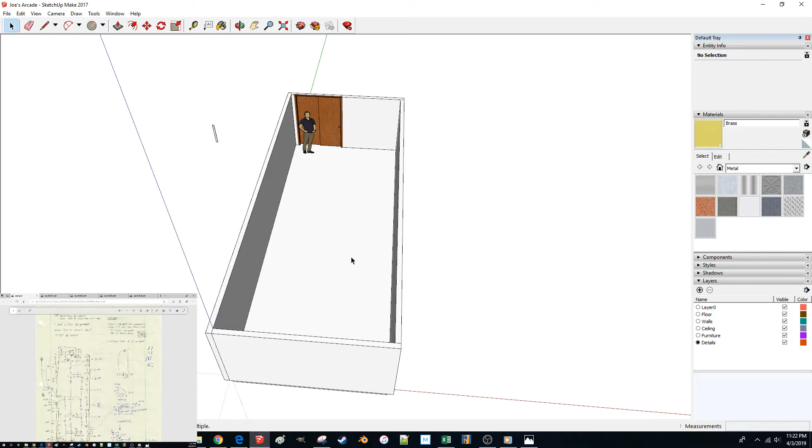And yeah, today we're going to try to do some of the trim around the floors and maybe do some of the rough tile texturing on the floor. And if I get really ambitious, I might do something with the lights. Big difference, hopefully, this time is that I've kind of looked ahead at what I'm going to try to do, so I will hopefully spend less time scrambling for dimensions on my really super messy notes that you can see here.

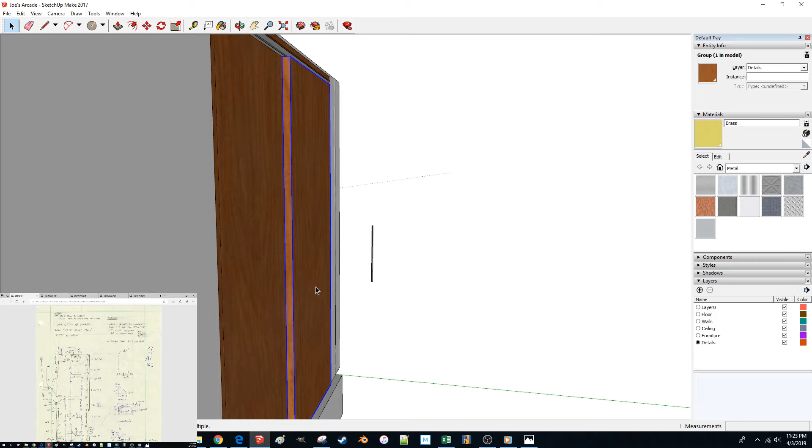Yeah, so anyway, right to the point, one comment that I received from the actual Joe of Joe's Arcade, who is not this guy, is that when I made a guess in the first round at what direction this door faced, my guess was wrong. So that should be flipped, I believe, and I did kind of verify that with the video here. He said that the one door is backwards, and I know this one's the right way because of where the handle is in the shot.

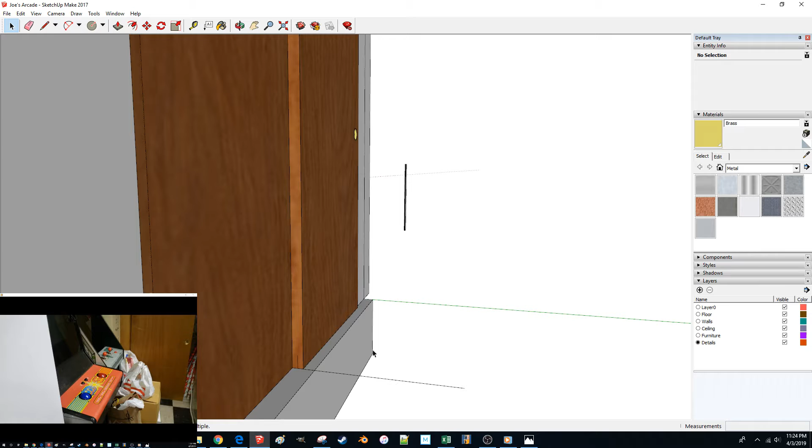So I'm going to flip this from my best understanding of the way it should be, and if I get it wrong, hopefully he will let me know and I can try to get it right again. Anyway, let's just scale that guy at a -1 like before. Move it in back to where it was, and now that handle is on the other side, and I think our doors are facing the way they should. And I guess that makes sense because it's probably the same door, just rotated 180 degrees to fit.

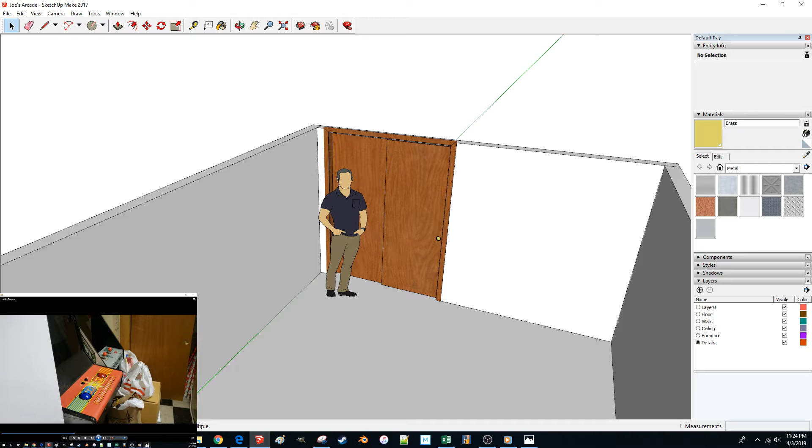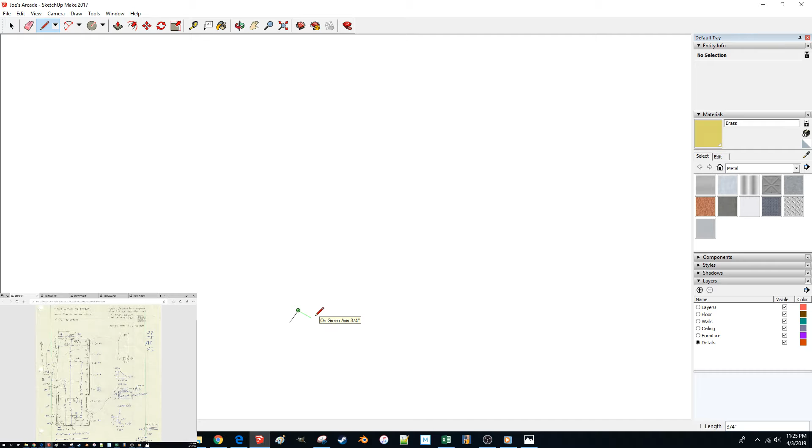Just off to the side here, I think, is where I'll do it. I'll kind of make this my component yard. So for the ceiling piece, that's going to be 3/4 of an inch. I'm going to have to get in real close here. By 3/4 of an inch. And then I come up at 0.2 inches, 0.2 inches, and close. And I'll just give this some length and group that. So that's going to be my ceiling piece.

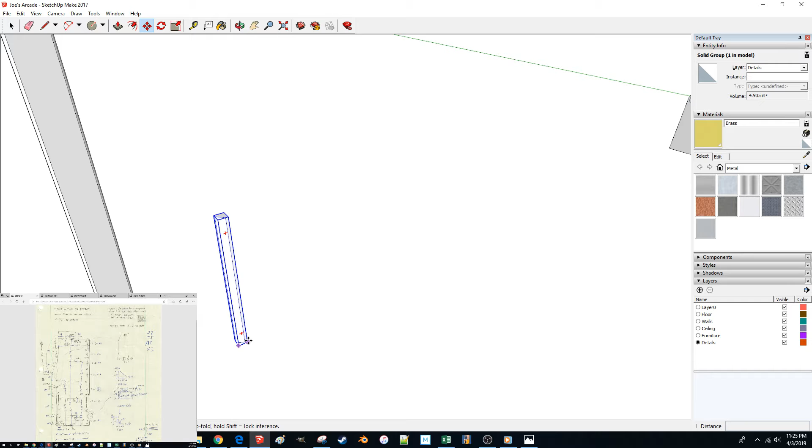And actually, let's go ahead and run that in. So I'll move it over here, and I'll rotate it down. Kind of a good example of what I'm going to be looking for, I think it was around 2 minutes in the video here. Maybe not. Oh, there we go. So clearly, I did not plan this out as well as I had expected. There we go, though. This is kind of what we're going for, is this detail in the corner here. This top row is what I'm doing, and then I'll do one for the corner and the sides.

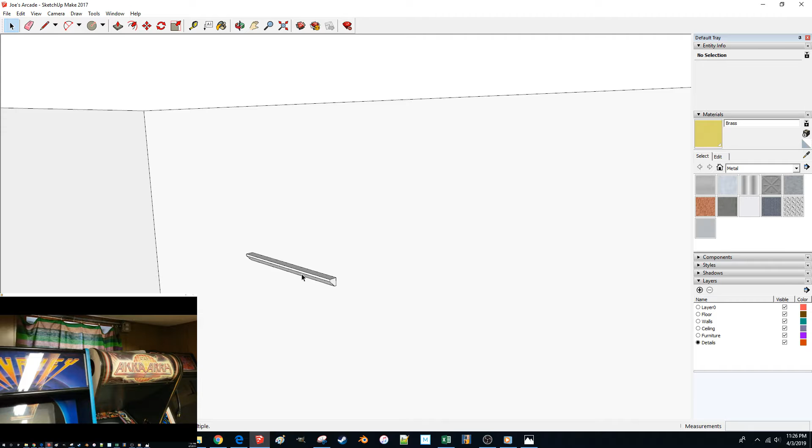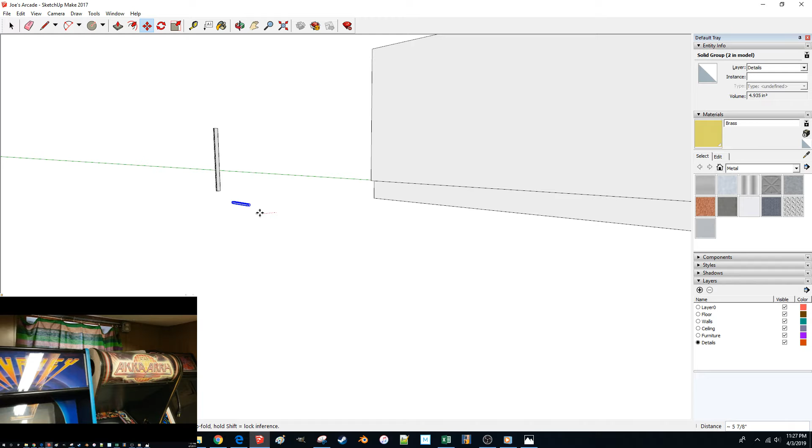Okay, so if I move this then up to our corner like that, that's how it should look. I'm going to copy it, because I should have done that before so I don't lose it when I make some geometry edits to it. Let's just put this down with our other piece for safekeeping. And I'll make another copy for this wall, one for the other wall, and for wall number 4. And I'll just end up rotating those around here. Drag this thing out like so.

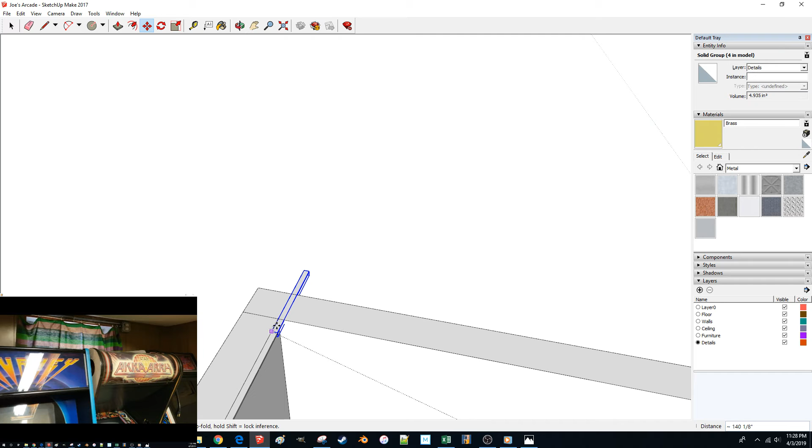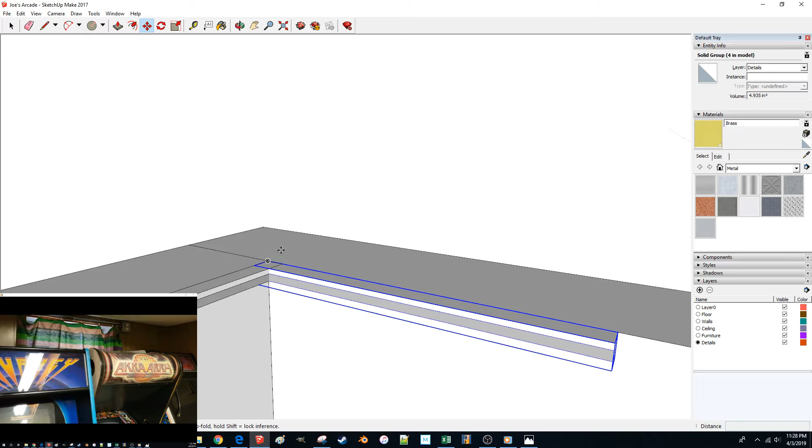This one will come up here to that corner, but it is going to actually need to rotate about this edge. Nope, I got it backwards, but that's no big deal. Rotate it there and like that. And I've already got a copy over on this side. So let's move that around. I'm keeping these on the details layer just because basically I'm going to use this layer for anything that is not a critical piece to seeing how the room looks. Just kind of some extra flair. So we've got that piece. Let's make that longer.

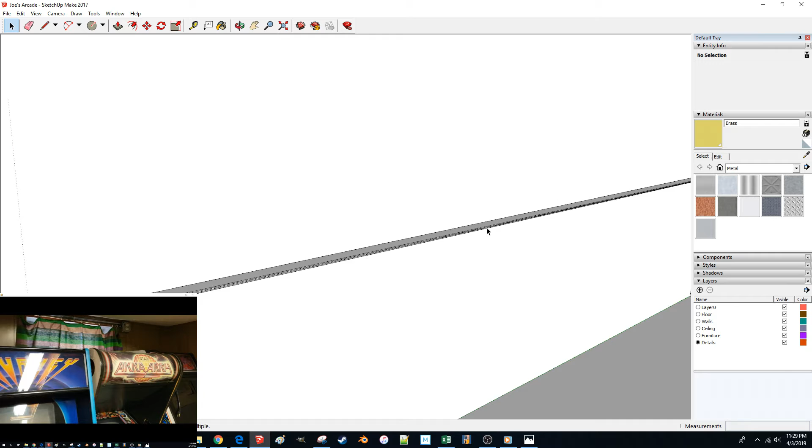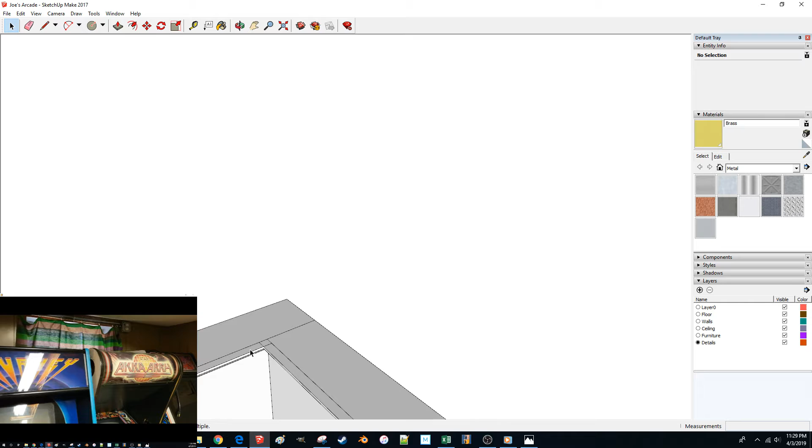Make this one a little bit longer. And then come on over to this side. I'll spin that. Move it on up. And then it's just going to extend here to the door frame. Obviously it wouldn't go past that. And we'll go ahead and copy that then to the other side to fill in that little gap over there.

And pull that back to where it should be. Okay, there we go. But I do think I want to clean this up a little bit because I'm a little bit of a perfectionist with this. And generally, I think a clean model is a better model, a little bit more stable, hopefully, as it gets large.

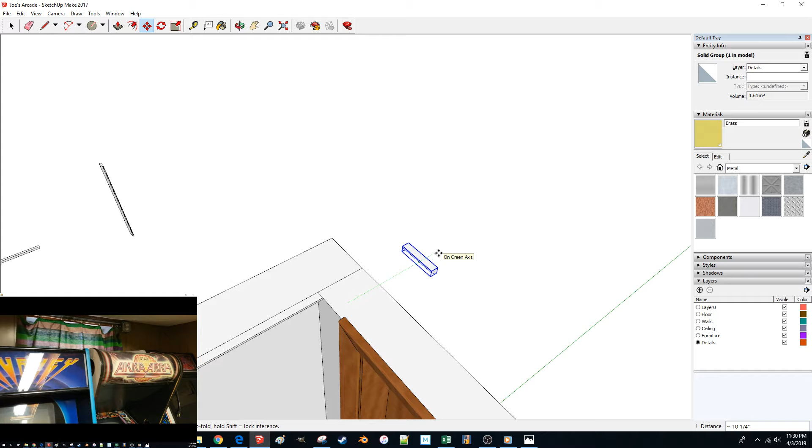So we'll do that. Let's see if what I just did there actually worked, because I don't know. Looks like I need a line up top here like that. But then I can delete these lines and still have my inner angled face there.

So move that back in. And now you can see, of course, that I've got kind of an overlapping edge here still. I think that ought to take care of it. Let's move that guy over to where I can see it.

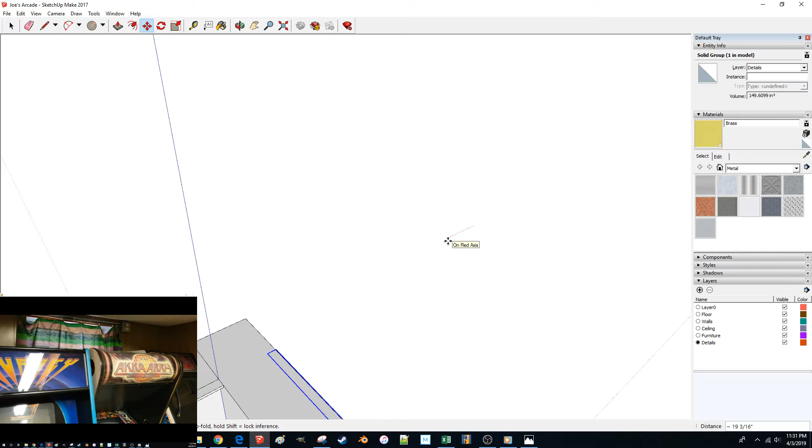Delete, delete, delete. Oops. And delete. And while I'm at it, get this side. Ooh, camera's being a little tricky there.

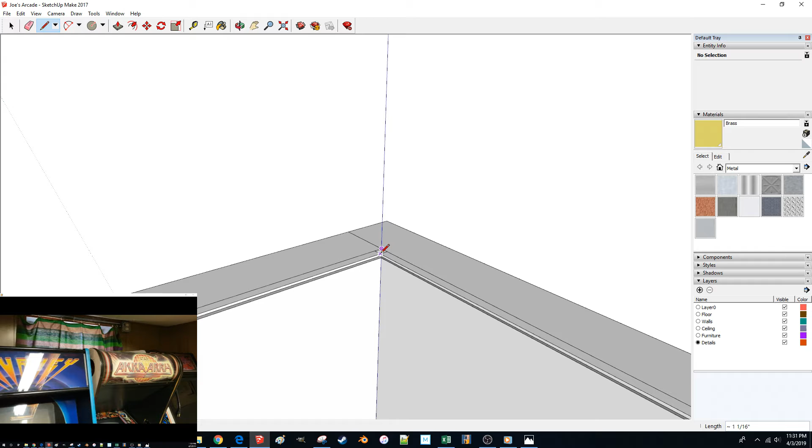I know what I'm going to do to make this a little bit faster, I think. I'm going to actually just draw this face over here. Come on up. I'll draw that face and I will copy it out this way 2 feet, and I will move it out this way 2 feet, and then I'll move these each individually as well.

I'll select those and I'll explode them, because then that line will break those faces. And I don't have to trace each one individually and tediously. But I still have to get those little bits of extra faces.

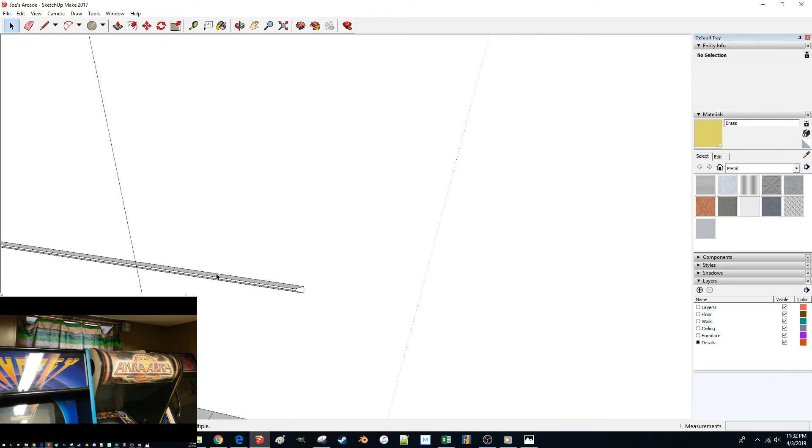That one's going to need one more chamfer cut in it. But I will need to bring it back over, it looks like, to get that drawn in.

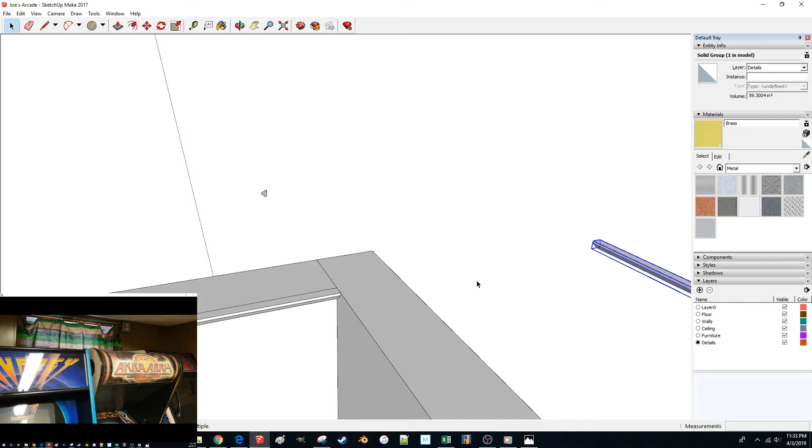So there, down, over and up. Same deal. Copy over. Move over. Move over. I'll get this one here while I'm looking at it.

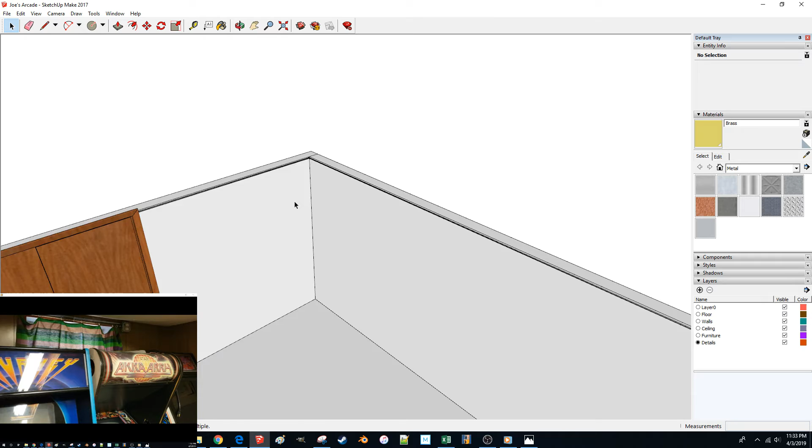Move that thing over 24 inches again. And learning from last time, I will catch this one like that.

24, 24, 24, and 24. Explode those things.

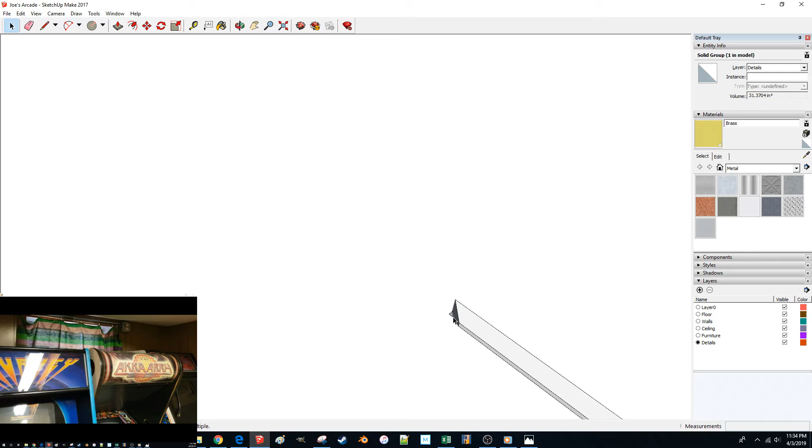This one can come back over already because it's only got the one side to do. Oh, I've lost it. There we go. And move that one back over. And there we go. Got those.

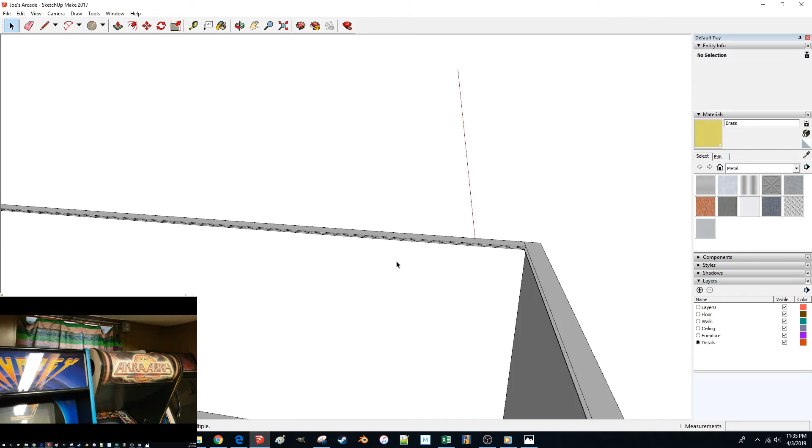Now I'll kind of do our other shape here, which was 0.75 again. Some of these little details can be really tricky. 0.18 and 0.18. And then we've got a circle in here.

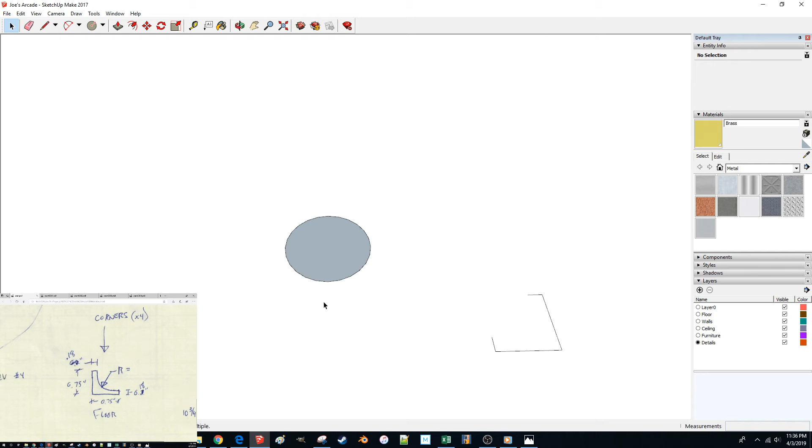And I just put radius equals, because at the time I was too lazy to actually calculate the radius, but that is just going to be 0.75 minus 0.18, which is 0.57. So it's going to look like that. And we will quarter that thing.

And it goes here. I'm going to delete that and recreate it so that I can create a face there to extrude. And let's make that a foot tall again.

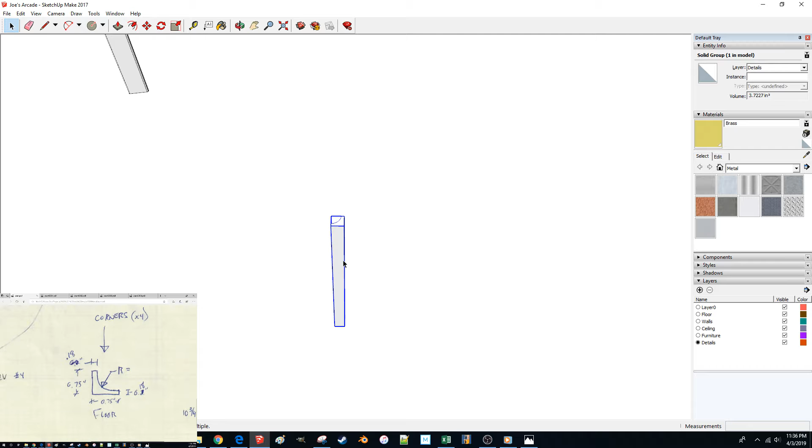This time I'll copy it over like that. Okay. I'm going to rotate it 90 degrees there. I'll copy another one, and I'll rotate this one to be horizontal.

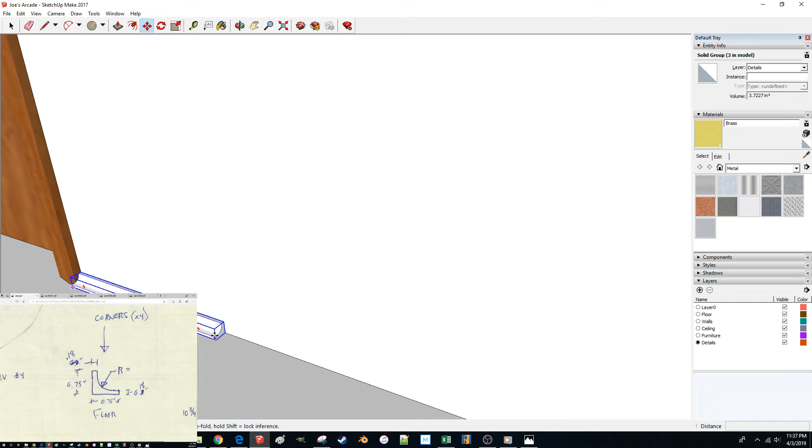This will be for our floor. Let's go ahead and put that where it goes, actually. Pop in under here. And I'll create a couple more while I'm at it for these other sections that are going to need some.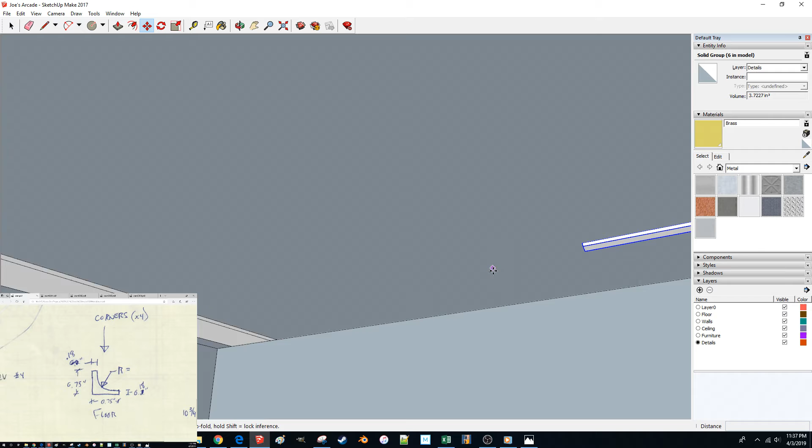Extend that guy over here. Pop in under the floor for this one.

There we go. Except I gotta move it flush here. And lengthen it out. This one's 180 degrees.

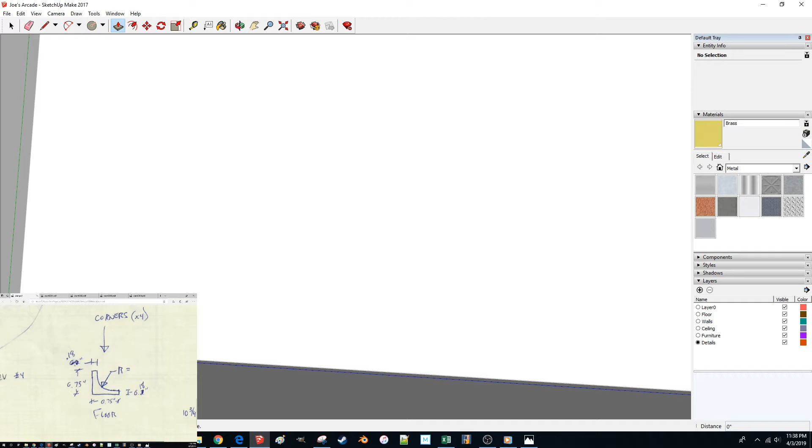And I'll grab this endpoint here. I'm using a 3D mouse for this, which is, in my opinion, the easiest way to move some of these things around, just because it enables me to move the camera right into the floor like that. With a normal mouse, it's a little bit trickier to do, but certainly doable. There's a couple tricks you can use just moving things along the coordinate axes to get that to work.

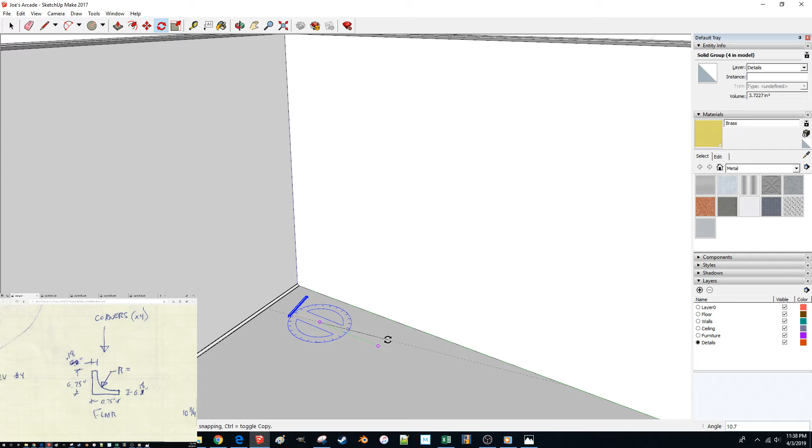With a normal mouse. We'll rotate this -90 because I can't really see what direction that's facing. I guessed wrong again, but that's okay. Grab that. Let's put it on the corner there.

And there. And last but not least, this little piece, which is going to be all of about 2 or 3 inches. Okay, I wonder if I guessed right on that. Yeah, 4 inches, not bad.

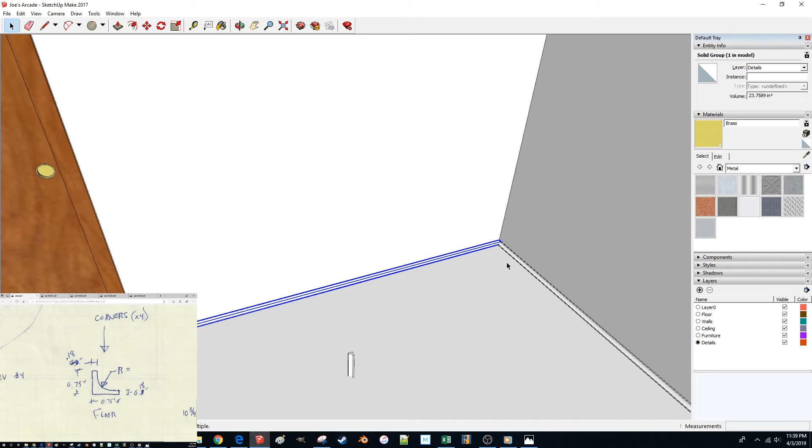Okay, so I'm going to do something a little bit different. Actually, I've got to think about how I'm going to approach this, because I do want to trim these off, but since they're curved faces, I don't want to have to draw all that geometry. So I'm going to create a whole bunch of copies to get this done.

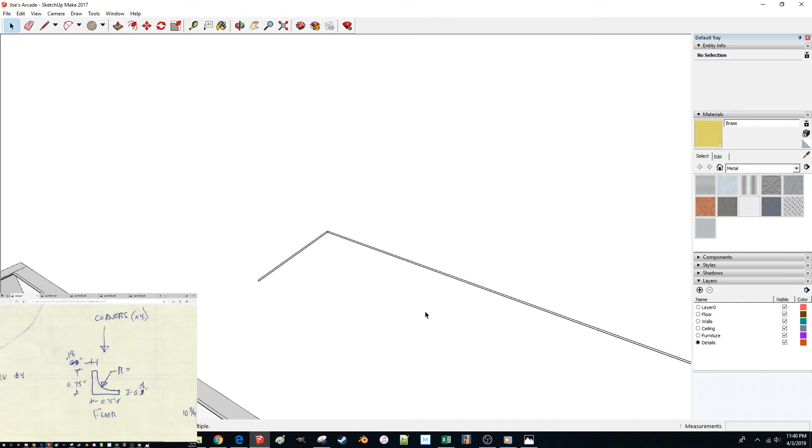I'll go over 200. I will explode these, and I'll do an intersect faces with model. And then, because I'd still like to keep them separate components, like separate pieces of wood, I will just then go ahead and trim them like this.

We'll see if this works. It sure did, okay. But before I close that loop, I want to clean this up a little bit. So we'll do that and that. And wow, that's nuts what's going on in there.

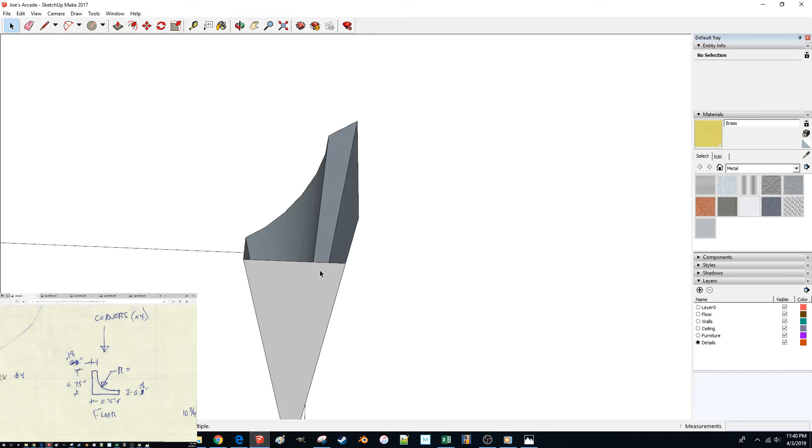Let's delete that arc because we don't need it. And we don't need that, or that, or that. And there we go, nice 45-degree chamfered edge. And I can move that guy back 200.

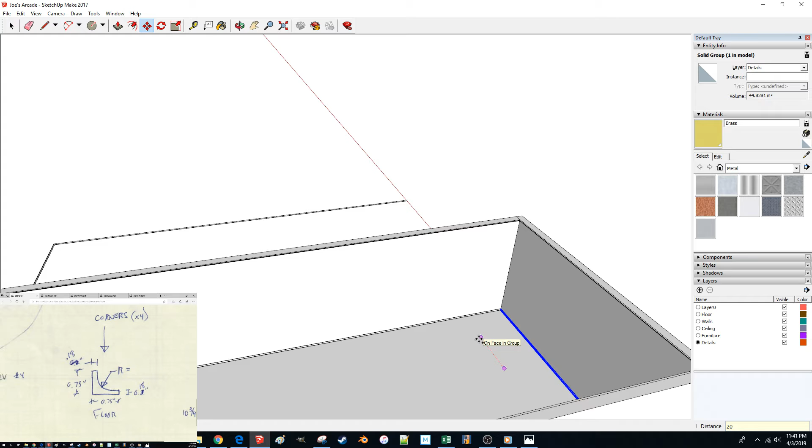I'm going to create another one for this edge here. Or this piece here, and I'll just create all of these while I'm thinking about it. Let's do that one. This will have to go, I think, 200 in the other direction to get clear of those walls. And for this last piece, let's just go 400.

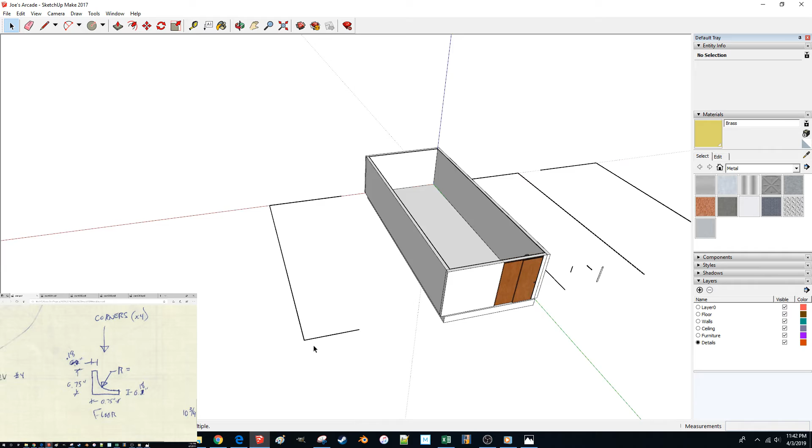And to be a little bit more efficient about it, I'll select all of these in one go. Do our explode, and deselect some of them. But then I will do my intersect faces with model. There we go, delete that.

Create my line here that I know I need now. That's gone. That arc's gone. And can't forget about these lines.

One end down. Oh, yeah, you can see the camera really gets a little bit wonky when you're doing this kind of a small detail in a large model.

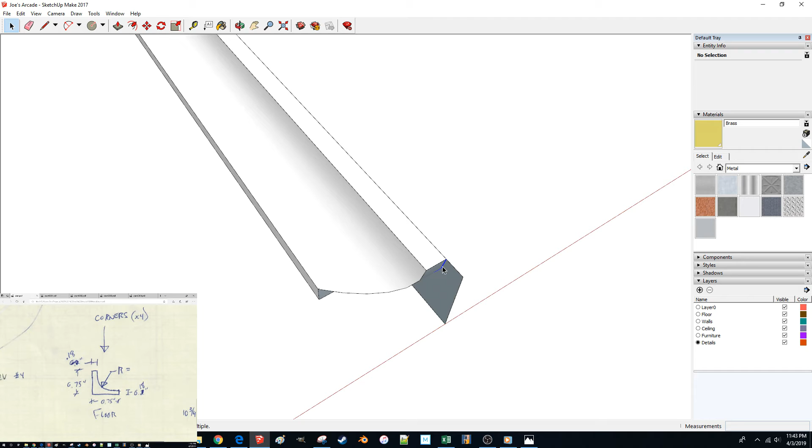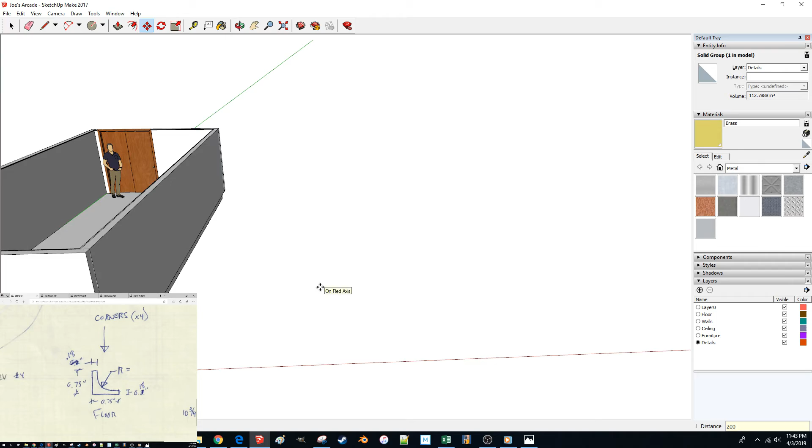There's that line. And I was supposed to delete this one. There we go. I'll group that guy back up. 200 over.

Okay, and then that can go away. That can go away, and I can delete these little bits while I'm here too. Delete our extra lines. Does seem like the order you delete some of these lines in does matter, but you get to the same spot usually.

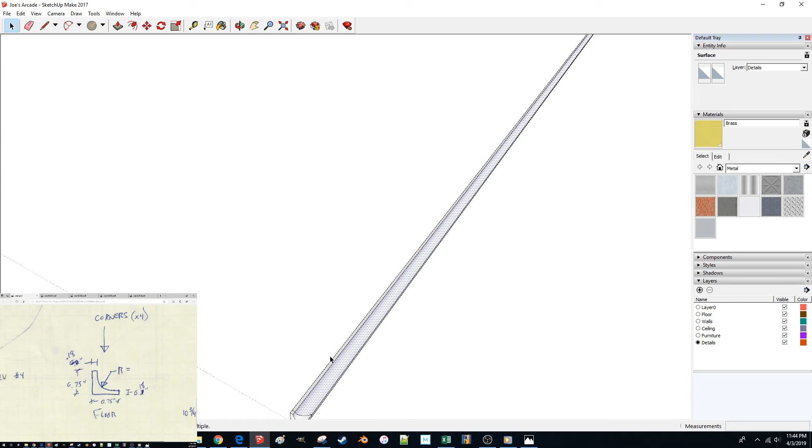I've got my nice edge there, and let's clean up this other side. And I did forget the short piece, didn't I? So I'll have to make another copy and get that one. Boom, boom, boom.

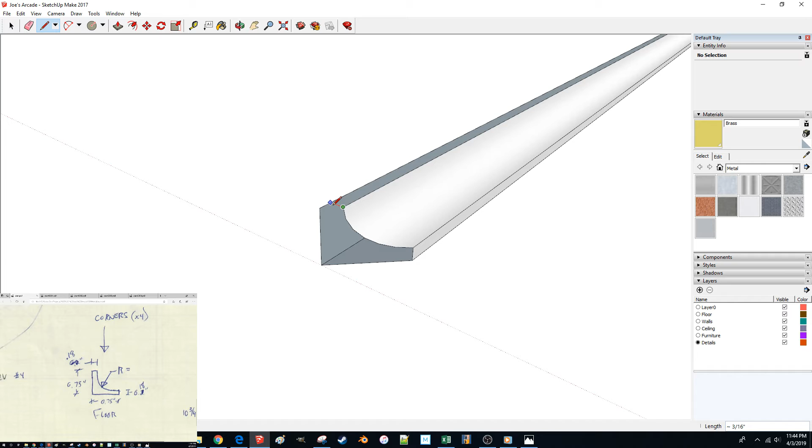Sometimes this can get a little bit repetitive, and there's other things I could do to speed this process along potentially. Depending on how many I was doing, I could create an angled face and rotate it around and then drag it around, and stretch it around using the move tool to kind of get this same effect.

Look what I've done here. I've deleted, so actually I'm going to use something similar to that method, just because I don't want to take the time to remodel that. I will copy this one and I'll scale it at a -1 factor to mirror that, because that should fit in nicely right here.

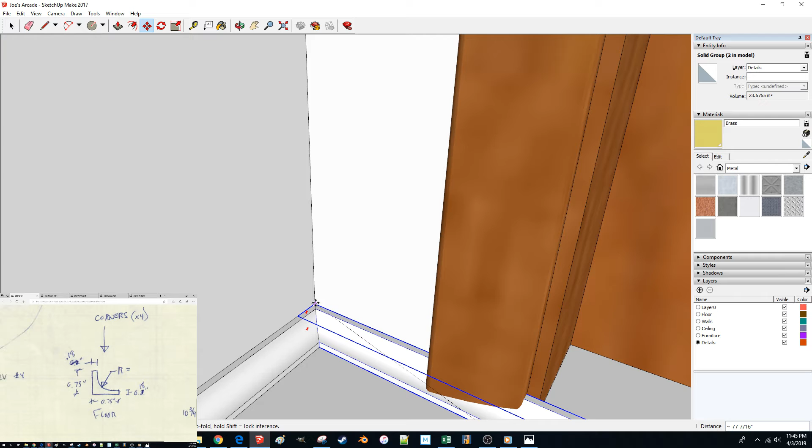So yeah, I mean, lots of different ways to get this done. I'm just doing it the way I am because it seemed the simplest at the time, but as you can see, that worked pretty well too. You have to do just a little bit more scaling and that kind of thing.

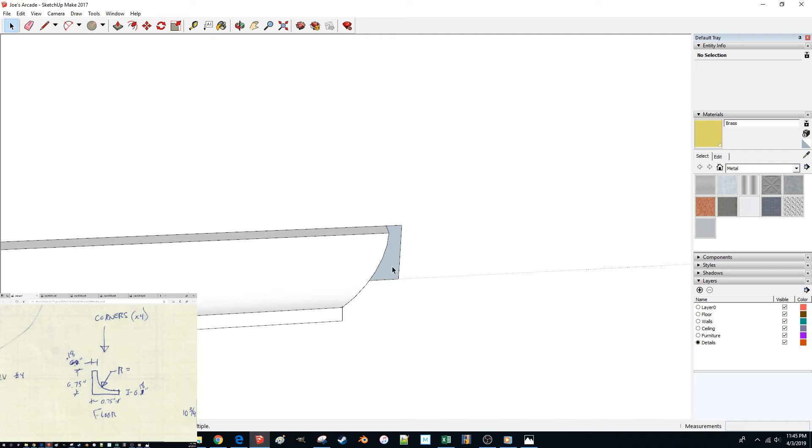Okay, then I'll come over here, get that, and these. Oh, I missed that line. Usually it's pretty easy to tell that you've missed something because the face you're watching for it to appear just doesn't show up. Gotcha. Gotcha, okay.

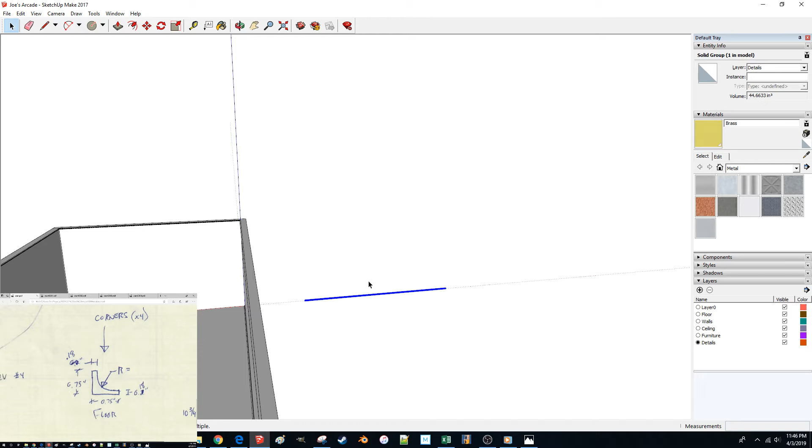200. There we go. Do I see something weird going on here? I sure hope I don't, but if I do... I totally do. What is that all about?

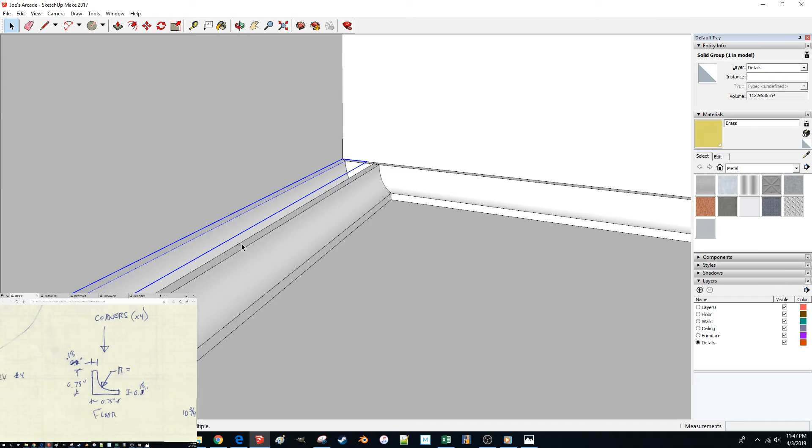Alright, let's move this one. What have I done here? I still have a raw one. I still have all the raw corners sitting around there. That's annoying, I'm going to get rid of those.

Let's make sure I don't have any of those other ones hiding around, just by recklessly deleting what I've got here. Let's put those back. Okay, good and cleaned up.

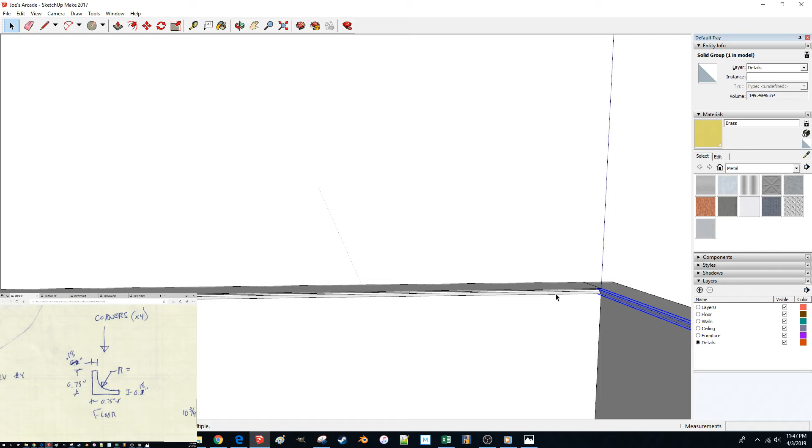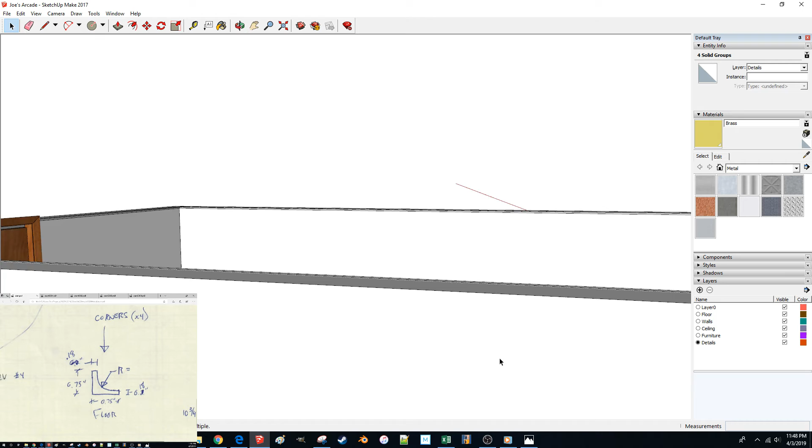Something else I'm going to go ahead and do, since these are sort of part of the same unit, even though I've just broken them up, is grab them and make groups out of those so I can drag them around. I can drag around all this trim at the same time if I feel like it. That might not be the right word to be calling it by, so if there's a different one, let me know. Okay, our last step here is going to be this.

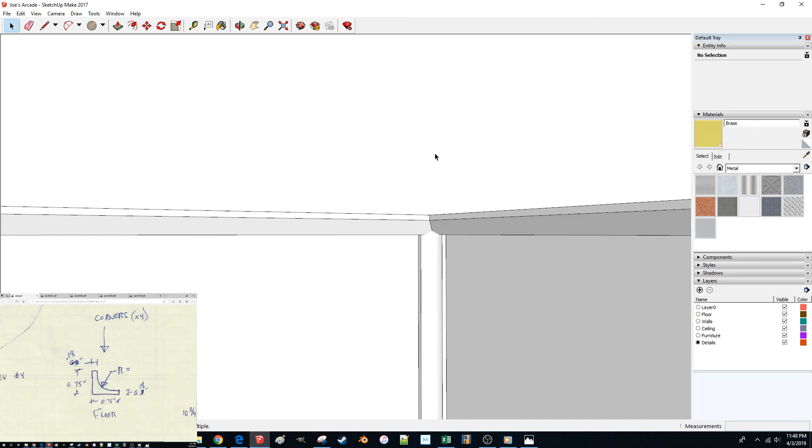I don't believe, from looking at it, at least from what I remember, there's some kind of crazy chamfer going on, like if I did that. Well, let's take a look at the video, see what we can see. It's a little bit grainy up there. But yeah, so it doesn't look like that is being angled in.

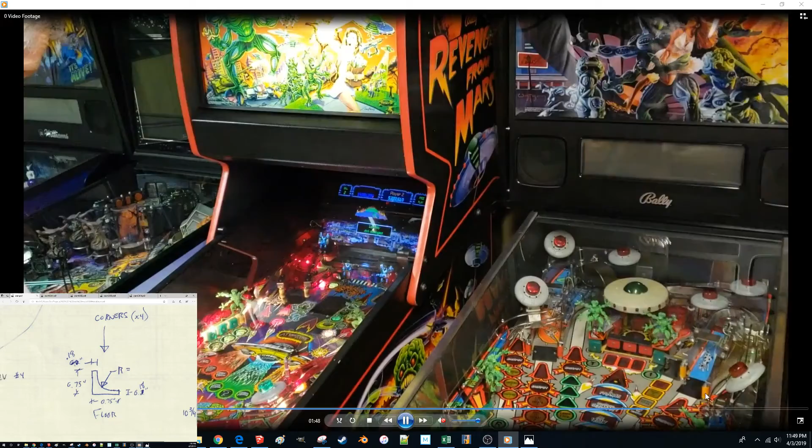Looking for maybe one more place to support that. So we move back along here. I think at the end I go back over to this door and look around too. Nope. Alright, let's take one more look around this side to try to nail this down. That was a good shot right there. Maybe. Maybe.

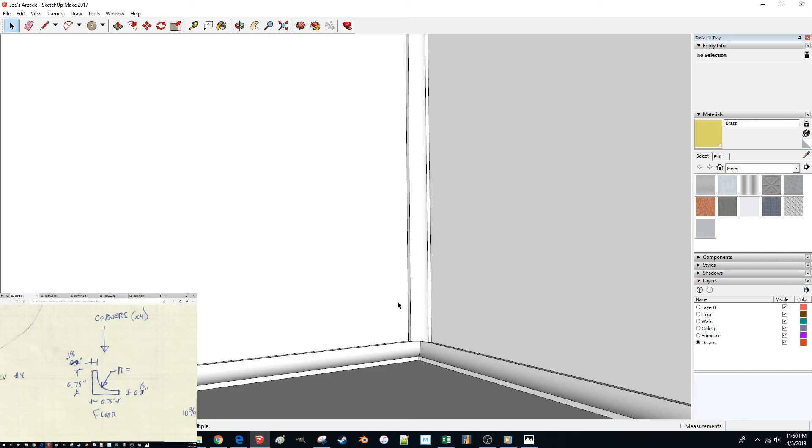Okay, yeah, so what I'm seeing there is that either this stops short like that and extends down to this other one, to our bottom, stops like that. Or it's the opposite and these corners get pulled back and that extends to the bottom and the full ceiling. That's something I might tweak later if I find out otherwise, but for now I'll show it like this.

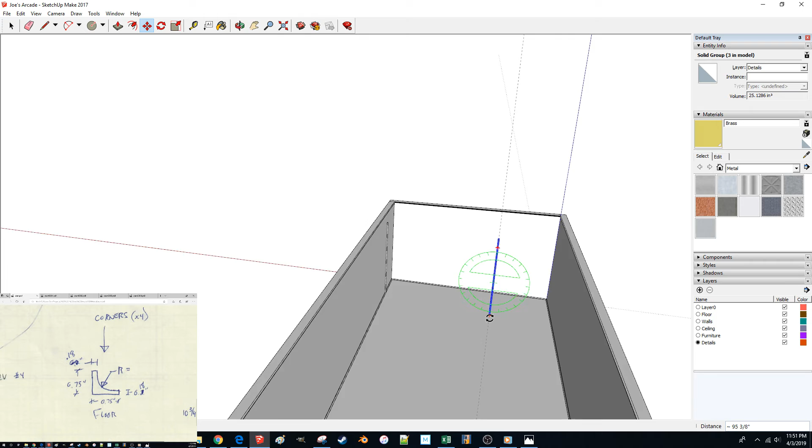Create a couple copies of this guy. It's going to be the same length in all four corners, just with some rotation. So let's go do a 180 there. And that looks pretty good to me.

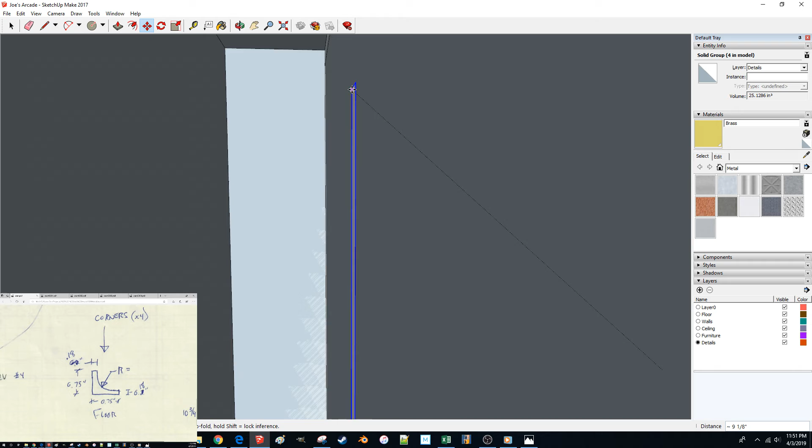Move this one up here. See if I can catch that same snap again. I'm surprised it got that on the first one. Doesn't look like it, so I'll just pop it into the wall, do it that way.

And then we've got one more, and I'll rotate it that way 90 degrees. Cool.

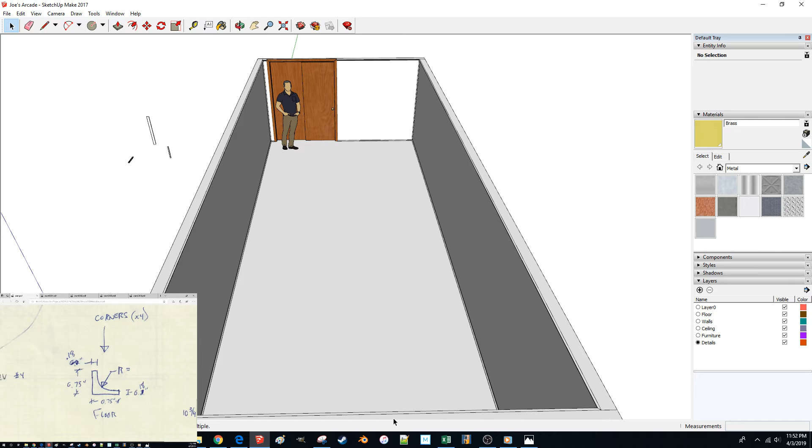Alright, so I've got those in. I'm not going to color them right now because I'm going to wait until we get some more of the details in so I can try to match those colors a little bit better from the picture. But the other thing I do want to get through is just a placeholder texture, at least for the tiles.

So what I'm going to do is open Paint here, and resize this image to be 2 pixels by 2 pixels, which, whew, that is one heck of an image. This is going to be like the most light-duty texture of all time. And I'm going to create not quite a dead black pattern of these tiles.

And looking at my other sheet here, I've got an origin point noted. There are 9-inch tiles in a 2x2 grid, and then they alternate. So we have black, black, black, black, and then 4 white, 4 black, 4 white that started that origin point.

So for the moment, I'm just going to put a black pixel here and here, and then I will do a similar thing, make this not pure white, and I'll create those there. And I'm going to save this thing under a new folder I'll call Textures.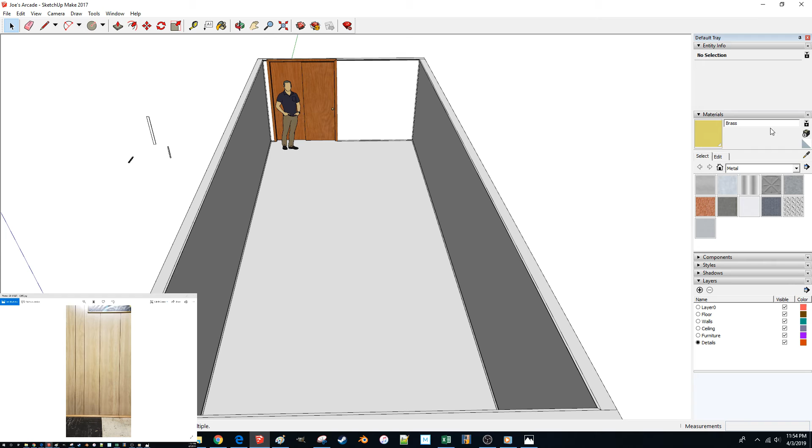Again, this is kind of going to be a placeholder, but I want to get a little bit more color in here, and I can get it aligned, and then I should be able to swap it out with a more final texture later. So I'll just call that Tile Floor. And I will come back over to SketchUp, and I'll create a new texture.

Called Tile Floor, and we want to use a texture image. Whoa, that does not look awesome, I've got to say. So we'll see what happens. These are going to be 18 inches by 18 inches. Don't know what colorize means, so I'm not going to do it.

Yeah, that'll be the default size of that thing. So okay, we've got that created now. We'll see how well it comes in. I might have to bump it up, resize it a little bit so it doesn't look totally awful.

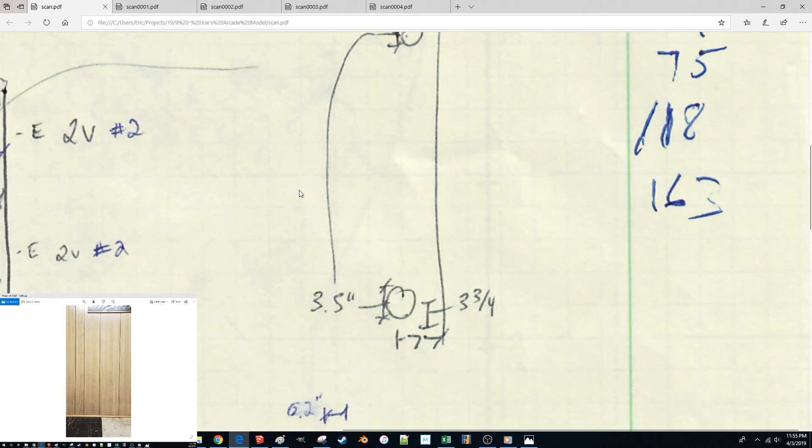Last thing I want to look at to get that in place is down here at the bottom of my dimensions drawing. I have this origin point called out, and I've got to say I don't quite know what I was doing, because this is the worst dimension note taking that I may have ever done in my whole life.

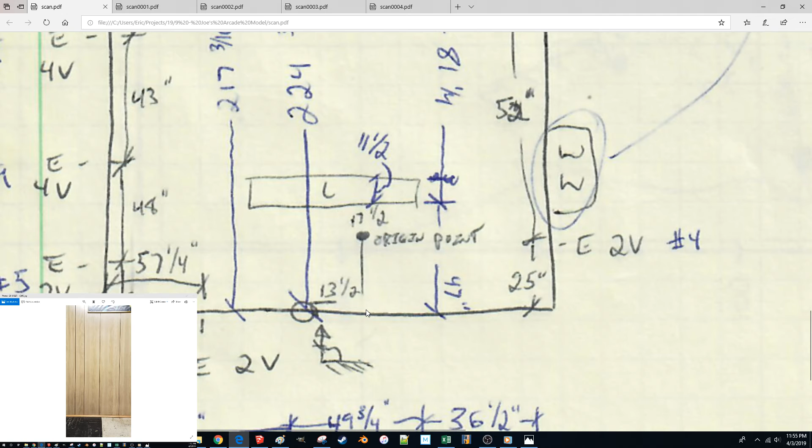17.5 from basically this wall, and 13.5 from what I am understanding to be this dimension 58. The reason I believe that to be the case is that if you add 58, 13.5, and round up the half inch for measurement error, it's divisible by 18 into an even number. Since these tiles probably actually start at a corner, I'm thinking that's the correct dimension. And 17.5, if I measure back the extra 3/4 of an inch covered by our base trim here, that's also divisible by 18.

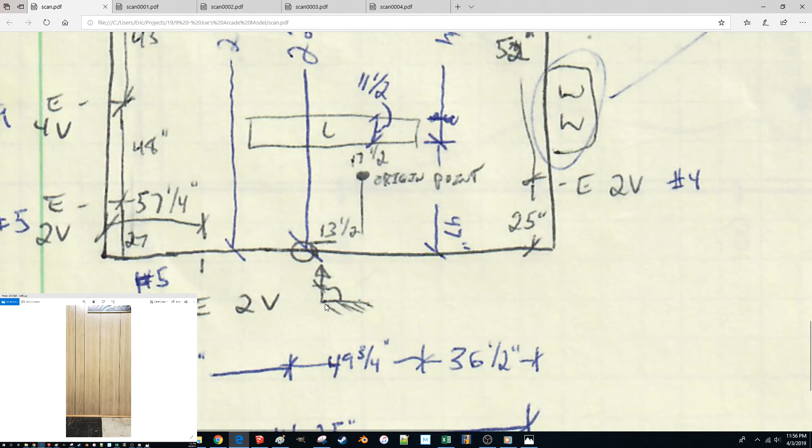As I'm saying this, I remember something else I noticed while reviewing these dimensions. This dimension here, I've got a little circle for the total length of the room, and that is being shown to the face of that 3/4 inch trim. So I actually shortened this room by an extra 3/4 of an inch than I should have when I first set it up. I'm going to adjust that here too.

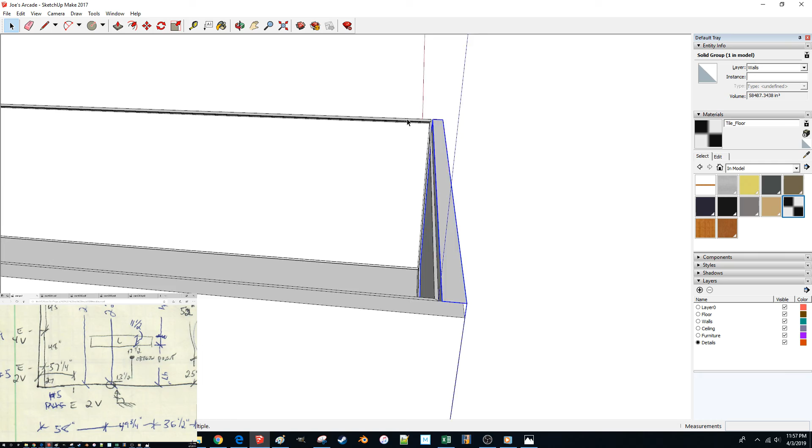I'm going to grab the wall and move it 3/4 of an inch. Fortunately, and I find this to be a bit of an advantage of group modeling, although it's not too hard to do otherwise, this is a pretty easy type of adjustment to make.

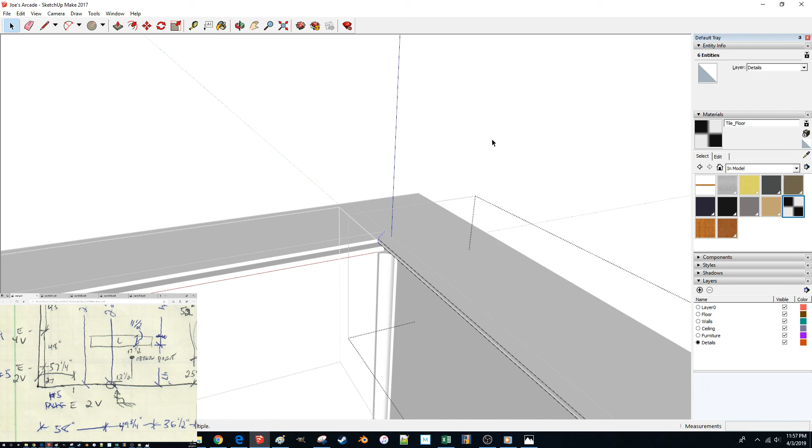What did I do here? 4 3/4. Okay. Oop, I gotta orient faces on this guy. And move that back into the corner. Wish I had remembered to do this as I was actually putting these in, but that's what you get, I guess.

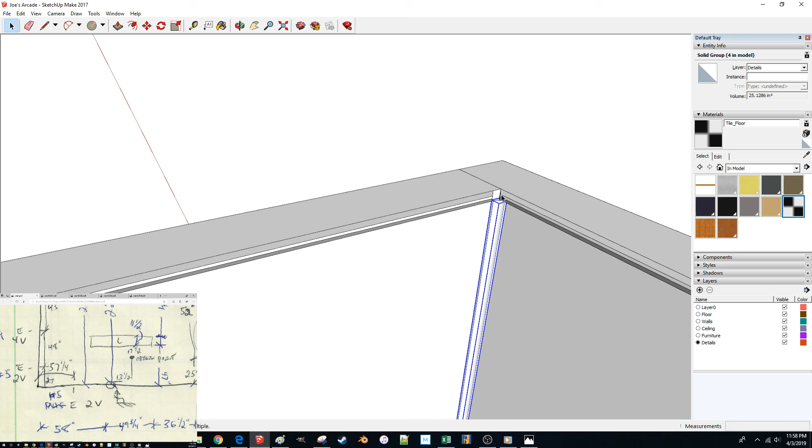Move my floor slab out there and clean up this corner. We'll be good to roll. Oops, got a little bit overzealous with the clicking there. And we'll move that 0.75. Okay, problem solved. Back on track.

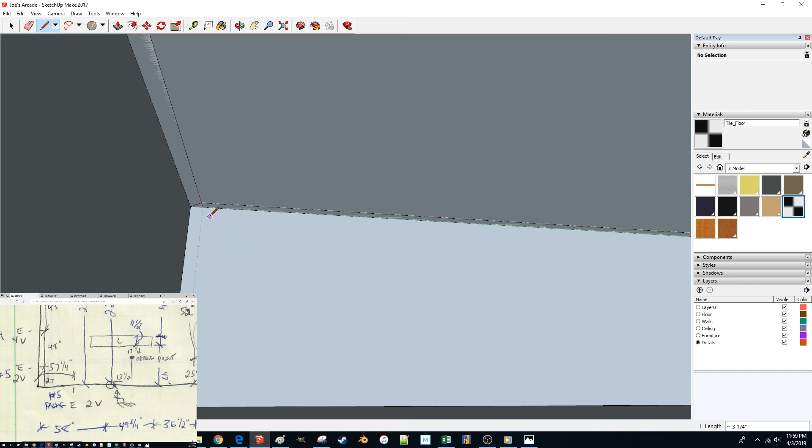So, yes, what I believe is the correct dimension to show here is if I come from this point, which is the corner of my wall there. I believe. Did I get it? Or did I get something else? I got something else. I need to come from this point up 18 inches, just rounding that to make this work out nice and evenly like it probably should. And 58 plus 14, because rounding up that 13.5, so 58 plus 14, that's 72 inches.

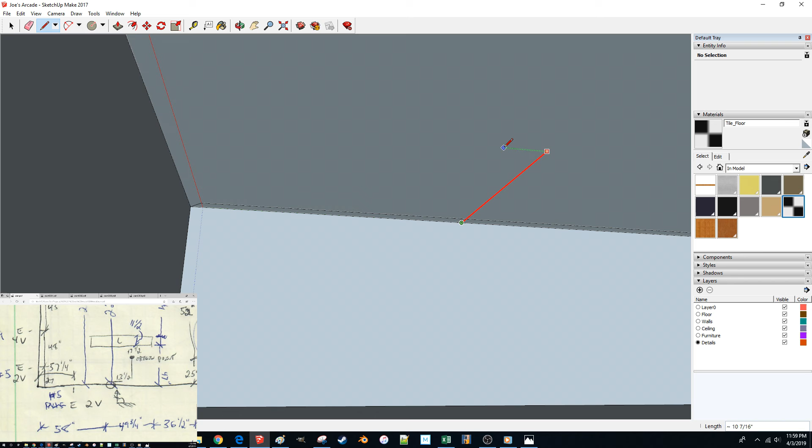That is where my tile pattern should start. Okay. I'm also going to just draw an 18-inch by 18-inch square here, because this way I can double check that the sizing on that is correct. I'll just delete that face though. Okay.

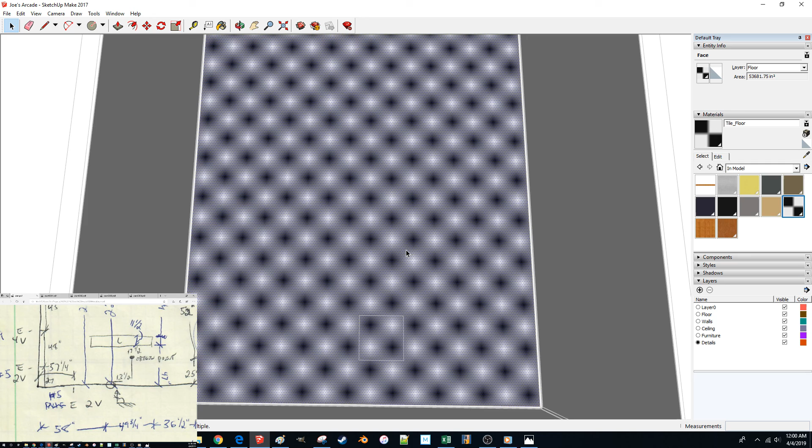So I will just texture that floor with... oh my goodness, that is awful. Alright, so what I need to do to fix that is just bump up the resolution of this texture. Fortunately, it should be pretty easy, I think. Well, let's see what happens.

Let's make that 256 by 256, and oh my, it's only done 1 pixel. So let's select all and resize that to be 256 by 256.

Challenges. What's happened here is my canvas was not large enough. So I'm going to just make it really ginormous so that I can get this right. I suspect it might blur the lines a little bit too, which I'm not going to be thrilled about. No, it actually did pretty well. Cool. Now I'll drag this canvas back down to size.

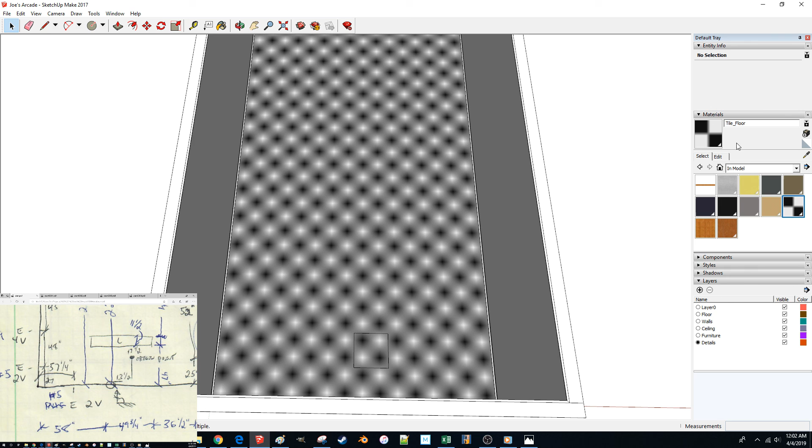I could crop it too, but this is pretty much just as easy. And we'll just save that again as tile floor. I'll come back in here, edit that, and yeah, look at that. That's much, much better. Just by reloading that there.

So, okay, now let's grab that texture and let's position it so the origin, whoa, is on this origin point. And you can see there with the position that those tiles line up nice and evenly with my edges of wall here. So I'd say that looks pretty good for the moment. Yeah, I'm pretty happy with that, except, yeah, okay. So yeah, that's a pretty good starter for our checker pattern. And I think we'll go ahead and call it there.